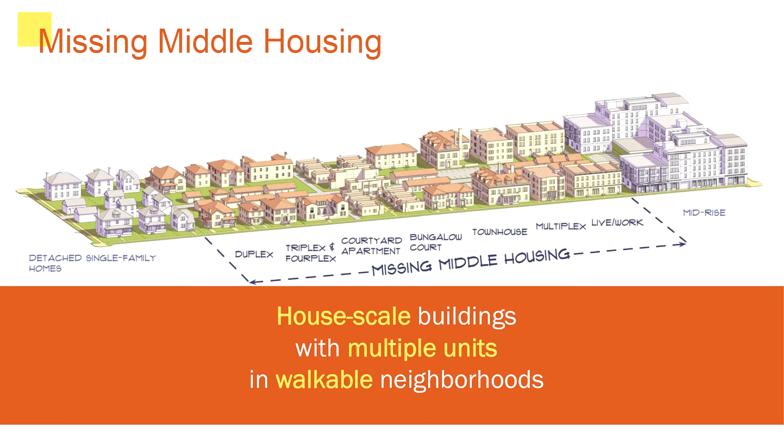So what's missing middle housing? If you take anything away tonight, it is not the new way to do medium density housing out in the middle of nowhere. I really hope you take away that this is part and parcel of walkable places, and walkable places include something other than houses.

But before we go further, it doesn't mean that if you're the home builder, you have to build a commercial center. It means that if this is a center, the walking radius around it, and the center doesn't have to be a circle, that 5 to 10 minute walking radius around that amenity is where you start looking to do missing middle housing. Does it work everywhere? No. Some places won't want it, some places can't support it, but those are the places, not way down the freeway where you got cheap land and somebody said let's try this out.

So again, there's the missing middle. It's everything between single-family houses and big apartments. We'll go through each of the types, but there's a palette of types. This is really important to know: it's not just more housing, it's actually physical objects like a duplex that you probably are aware of, but there are a lot of nuances to each of these types, like a 4-plex, a 6-plex, a 12-plex.

There are nuances to their size and form, how they fit on a lot, and how wide a lot they really need. All those things work backwards into actually fitting well in a neighborhood. Otherwise you're just doing more apartments and people say, I don't want that near me. Everybody knows that drill, right?

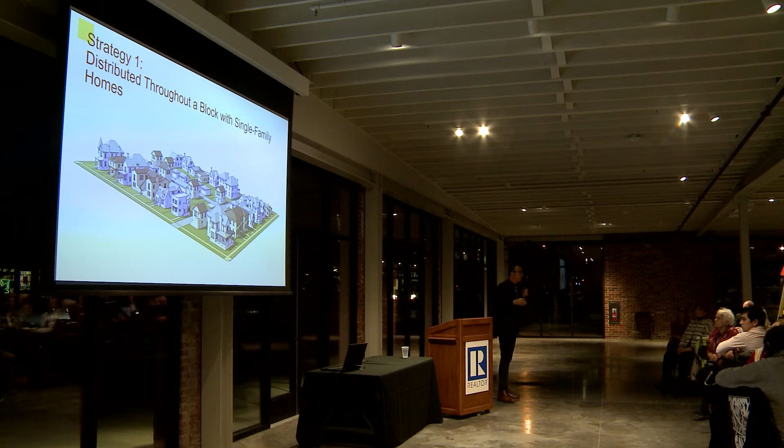One is, as I showed in that Greenville example, to distribute it throughout the neighborhood. That would mean you'd allow—not require—these types through the zoning code to be built in a neighborhood. Of course, that short statement is probably a 2-year or 1-year process in actually figuring out what would be allowed, how big it would be, and when. So I'm not trying to simplify that or put it down—I'm just talking about the approaches.

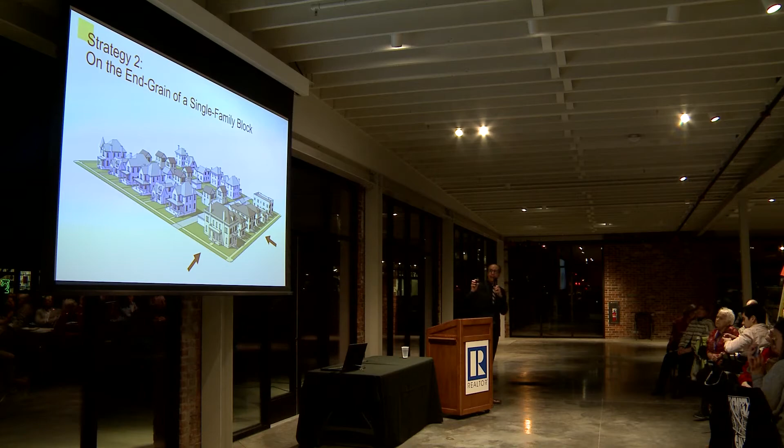The next one is: the single-family neighborhood is very uptight about any change, and maybe they'll accept some accessory dwelling units in the back or backyard, but that's it. Where they really will accept changes is on that corridor—that busy street outside the neighborhood that's sort of dying on the vine—that might be where we look for some missing middle.

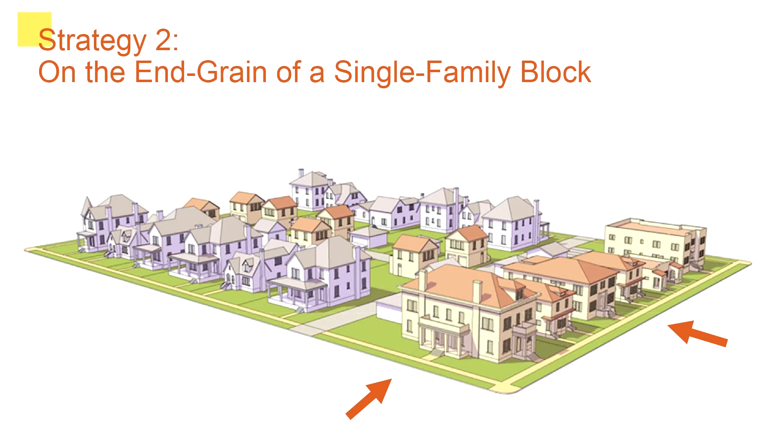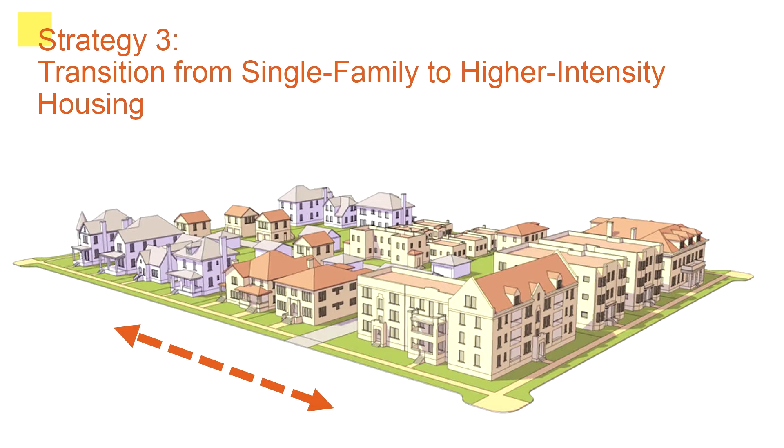That's strategy 2. Strategy 3 says: there are some bigger apartment buildings that aren't missing middle, already built on that busy street. Now, on the side street coming off that busy street with the big apartments, the first or second lot receives a lot of pressure to change because it's right next to that bigger thing. The people living in it say, 'I love living in my 1-story house, but now I'm next to that 4 or 5-story building and I don't like it anymore, I'm going to sell.' So that lot becomes vulnerable to change—people don't think it is, but it happens.

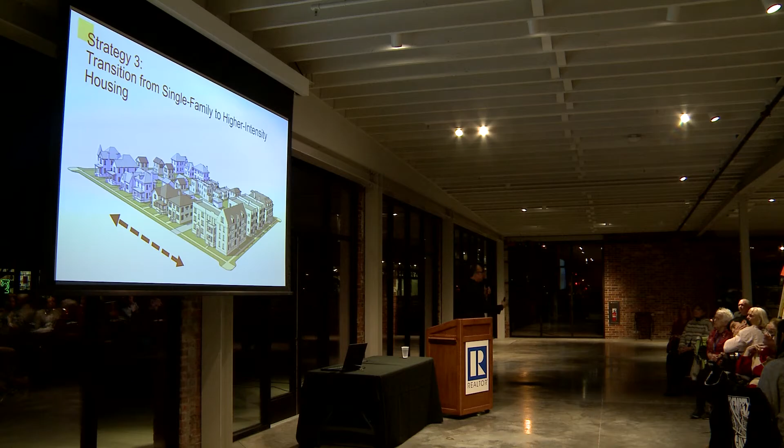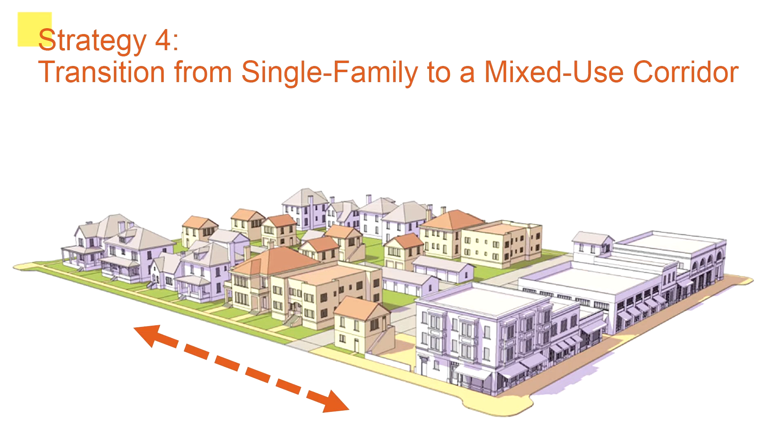So you write standards saying those first 2 lots—maybe just that first lot—when you come in off the return from that big street onto the side street, that's where you could allow missing middle, only there. The last one is a similar version using a main street—maybe it's not a main street like this, but it's basically a commercial street. So what are the important characteristics of this?

Well, I've said it—it's all critical because you're not just putting these things out in the middle of nowhere, like this empty space right here. There's one right there. Everybody's sitting around this, and there's a scale, and you feel a certain comfort.

And all of a sudden, if I came in here and started doing the wrong thing, you'd say you don't fit. It's the same thing with buildings. Even though it's dying on the vine right now, the policy direction in the comp plan says that should be an important center to get reinvested in, and that's going to stay commercial. The intent is for that to be better than it is. Then you can put missing middle housing there, so you don't have to do both, just have to have both, if that makes sense.

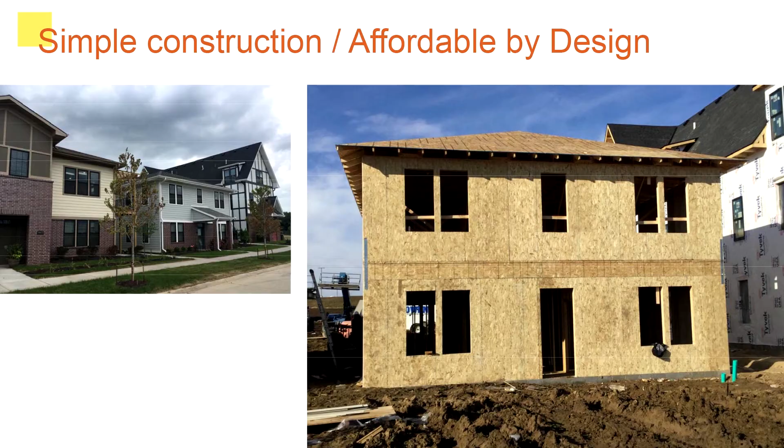So, barriers—a couple more sections here. I'm talking nationally and about our recent work. I have not looked at your zoning code, I have not looked at your comp plan, I don't know anything about that, so I'm not speaking about yours, okay? The barriers we find are this thing about density—or if you use the other way, lot area per unit—that can result in unintended consequences. The people who write these rules never said, 'let's get a building like this.' Nobody did that, right? But what happens is the math on the properties isn't always figured out ahead of time.

It's rare for somebody to look at parcels that the zoning is applied to and say, wow, I wonder how many units that would result in, and what size or type of building that would result in. And I wonder if those buildings would make good neighbors to the things that already exist there. That usually doesn't happen. So this is a result of yield - somebody saying the zoning says I'm allowed X number of units, and I'm going to achieve that. How many times have you heard that?

I tell young architects in the office - turn it around, you're the property owner now. Don't you want to achieve everything you can? You might be altruistic, and that would be great, but it's our nature to say, man, they told me I could get 12, I don't know that I shouldn't get 12, let me try for 12 units. A lot of times, people who are pursuing the most are cast as something not good.

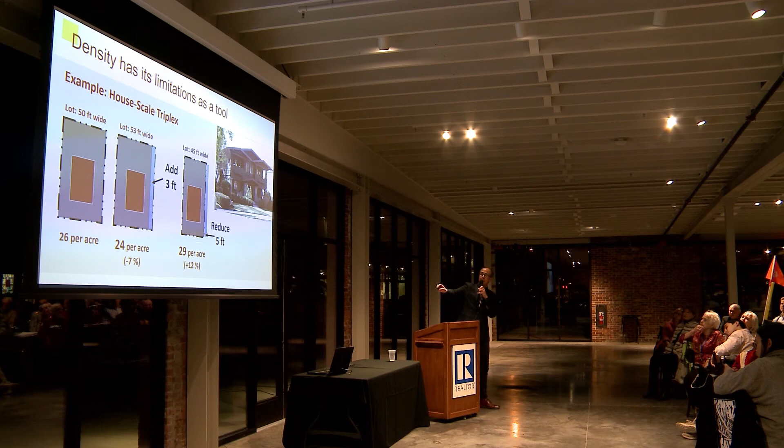Does that feel better? It's the same thing. And this 3 feet of lot width is almost imperceivable - there could be a bush hiding it and you wouldn't even know it was wider. Then let's go the other way. Let's say we're going to reduce it - we're not going to add to it, we're going to take that 50-foot lot and cut it by 5 feet, so almost probably that wide, my feet spread apart, that wide.

We're going to reduce it by that. Again, a couple bushes could hide that. And it goes up to 29 per acre. So the thing is, 26 goes up to 29 - you increase the density by 12%. So if you had that conversation and said, hey, somebody wants to do this, but they want to increase the density by 12%, you'd say no way, that's already too high. But if you have this conversation, you realize it's not changing the object at all. It's still a triplex, it's still the same building. It's just the lot width got a little narrower.

Do you see how unpredictable density or lot area per unit is as a tool? Yes, it's important, but it's more important as a projecting tool - let's say this room was a region or an entire city or a county. It's important at that scale to say, over that big of an area, if we make an assumption, what would we get? It's really useful that way. But when you get down to the lot, it doesn't make a lot of sense. You can reverse it and make it work for you, but people don't usually do that.

Maybe your city does that already, I don't know.

Another barrier is financing. I'm not an expert on this, but once you get above or hit 5 units, the loans change. I don't know about Missouri, but in other states the loans change from a residential loan to a commercial loan, and it's seen as something bigger than it really is, so that's a deterrent. That needs to be addressed with your local bankers—why is that, and is there a way to allow 5 and 6-plexes in the same way you'd allow a 4-plex.

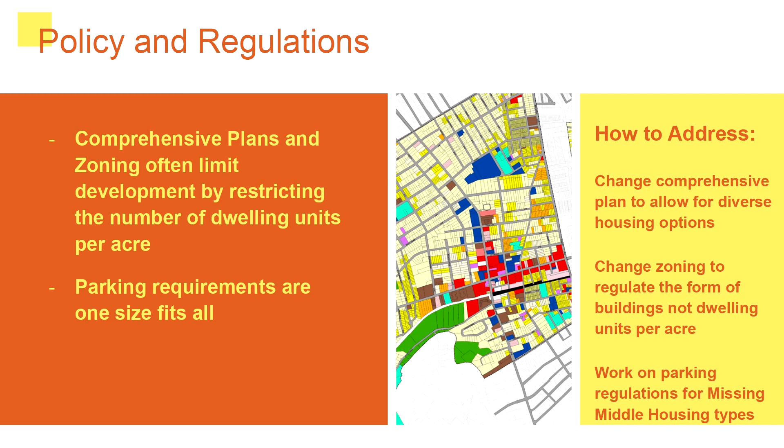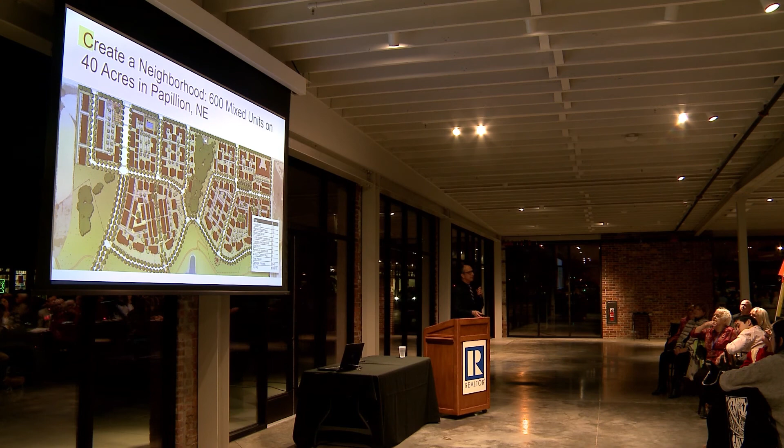It's interesting—he said people come here and ask, where are the apartments? Because they don't see the parking lots. He says there are no parking lots. It's built like a neighborhood with garages or parking in the back or down the side, and it feels like a neighborhood of houses, even though they're not houses. Nothing here is a single-family house—they're all duplexes, fourplexes, a couple triplexes, sixplexes. I think there's a 12 as well.

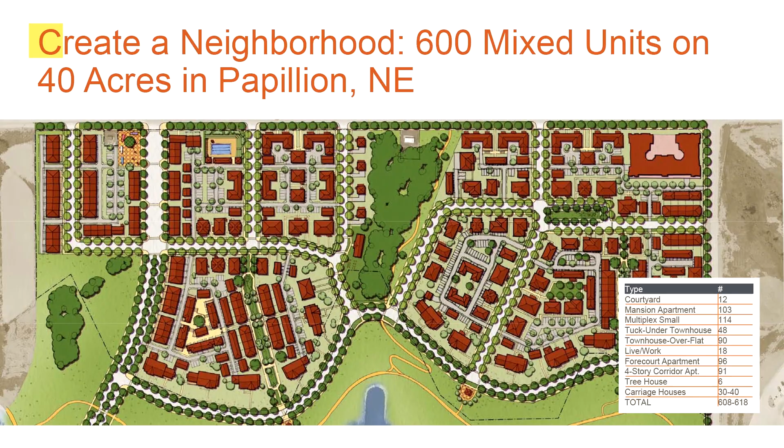For the builders out there, and even for the neighbors, you have to be efficient. You can't be creating snowflakes or asking the developers to create snowflakes—there's a certain efficiency that is necessary, it's a reality. In this case, with 600 units, we developed several building types on the palette I showed you, but their footprints are going to be different. To help the developer, we identified 6 floor plans that could be mixed and matched into 7 or 8 different configurations to give that building type the look and feel on the street.

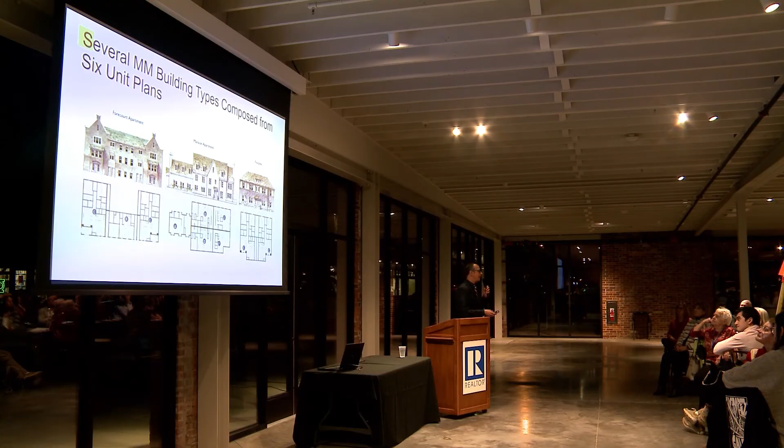Meanwhile, the whole time, the developer's only using 6 different floor plans. You might say that's too many, but the point is this guy wanted to narrow it down to 6. He also said, I don't want any corridor hallways—I want these things to really be like houses like they used to do. The corridor hallways I do in my big buildings, I don't want that. It's 15% wasted space. You may not agree with that, but that's what he said.

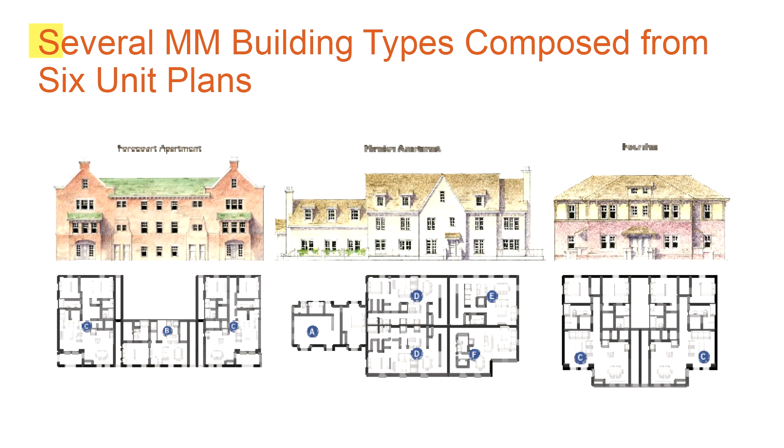These are the first couple of buildings getting built. They're all 2 stories with an occupied attic.

Work with a builder that wants to try this out, or builders, plural. Find a site that has all the right things going for it to be your first one, and then do it there. Work carefully, knowing that what you're going to do is going to be either the failure or the success of this approach.

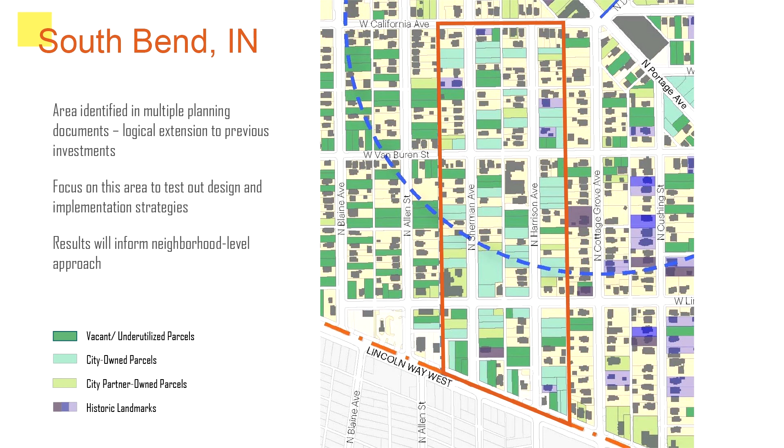When you do that—in the Northwest is where we've seen it several times—they've done these pilot projects with a very carefully crafted first project, and people say, wow, that's what you want to do? Yeah, okay, I thought you meant this other thing. This is great, we want more of that. And that's what the pilot project can do.

So it's very important to draw a distinction between relaxing the current standards and just saying, no, let's not put that pressure on this project.

Let's know that we're probably going to make adjustments or new standards. Maybe you don't have to change all your standards, but you're going to use this project to basically reverse engineer it and ask, now that we know what this is, let's go to our existing standards and ask what needs to change. If nothing needs to change, great.

But usually there's something. The last couple of examples here of things to do. This is a project we did in South Bend, Indiana, studying all the lots in that place and figuring out which of these building types fit on them. I cannot emphasize enough the importance of doing this. Too often, this is not done, and some abstract measure of density or height is the only thing used, or people say, well, we'll review it and we'll know it when we see it.

And that's a pretty risky way to do it in our experience. What you want to do is use maps, especially now with GIS, it's even easier. You find out the prevalent parcel sizes. Are they 40 by 110s, 50 by 120s, 60 by 140s? What are they? Then you take these building types and find out what their footprints are and what lot widths they work on. You'll find out the stacked duplex works on all these lots, the side-by-side doesn't work on these lots, and so on. You start figuring that out, and you can start to realize where they fit and what type of standards they need to support that.

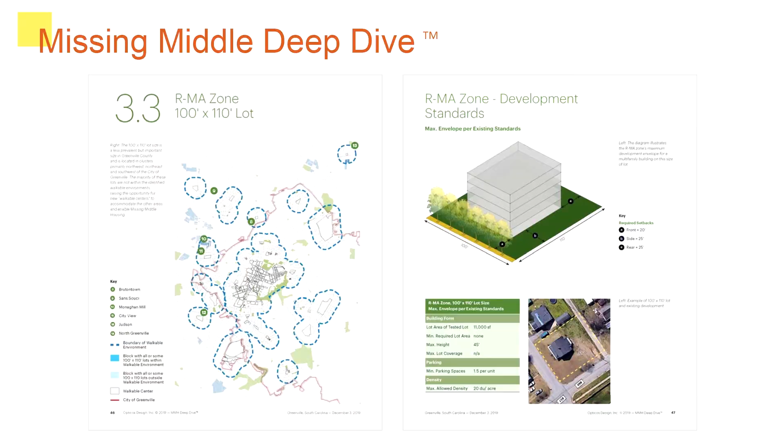So we took that RMA zone and applied it to the parcels and found the building envelope. Theoretically, this is what you could get. And after you apply all the standards, this is actually what you get. So then we said, let's try a third example: what missing middle types would fit on that same lot, regardless of the existing zoning?

Let's just say the mayor said, hey, we're going to try an example here. So we gave exact dimensions of what that is. In most cases, the thing that would hold these new things from coming in is the residential density or the side setbacks.

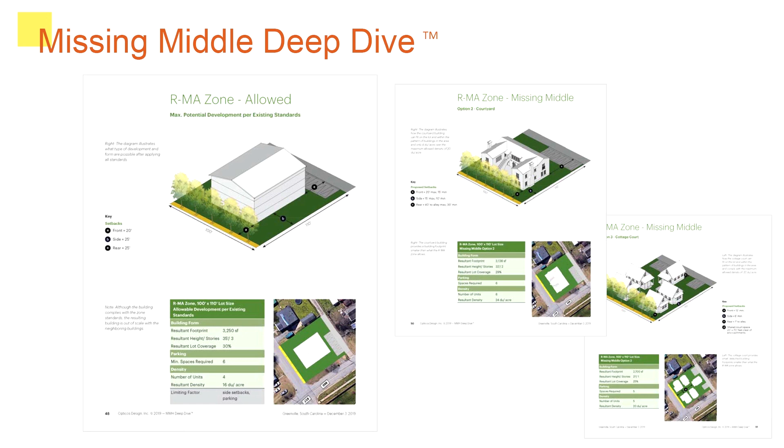In one case, I won't show you a picture of it, because I don't want people to make fun of them, but one of their zoning districts, which will remain unnamed, was really intended for big pieces of land, but it was mapped on existing infill lots, existing blocks. So when we applied that zone, a 50-foot lot that could accommodate several missing middle types ended up with a 25-foot side setback that rendered it useless. Nobody thought about that because they weren't even thinking it would be applied there. Again, there's no malice. There just wasn't any coordination between the fact that the standards of that zoning district were really intended for big pieces of property, but it's mapped on a lot of existing property.

So that's a quick run through of what missing middle is, what it isn't, how it works, and what it's intended to do. And I'm sure you have a million questions. Thank you very much.